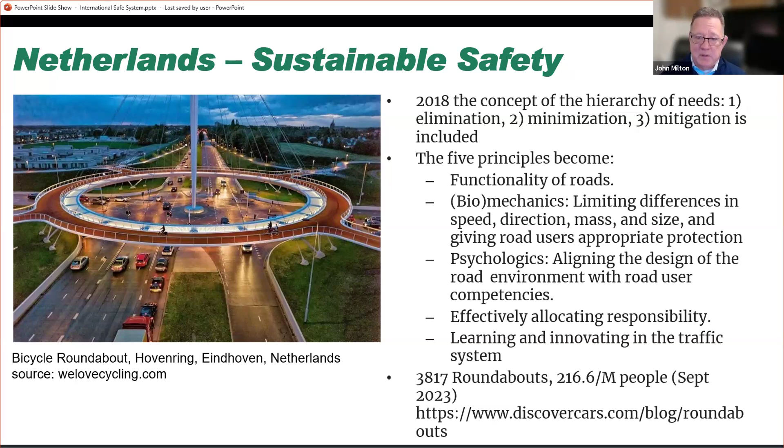The principles become functionality of roads, biomechanics. So limiting differences in speed, direction, mass, and size, and giving road users appropriate protection was one of their functions now as they go into their further implementation of the sustainable safety. They got into psychologics, or what we might call human factors, aligning the design of the road environment with the road user competencies, and then effectively allocating responsibility, our shared responsibility, and learning and innovating in traffic safety systems. Just an idea, they have 3,817 roundabouts. So their implementation is much further along than what we might see in Washington State.

The next country, and we often hear about Sweden as one of the primary factors in designing the safe system overall, they started with Vision Zero. Different in their approach as compared to what you had with sustainable safety, they really got into the philosophy as a moral obligation to bring that crash rate down to zero. In their country, it was as much about the design, but also about the willingness of the public to accept and understand what was expected of them in terms of road safety. They came up with a philosophy that no one should be killed or seriously injured in crashes. They really focused on setting targets and goals so that they would know and they could track where they were getting and the benefits that they were getting for how they were designing the system.

They also talked about allocation of responsibility for the prevention of injuries and essentially said that we can no longer, as a community, not address safety even when it's a behavioral issue. We need to do something. We need to look at the system and see what we can change to make things better. It's our idea with forgiving roadsides that you see in the US, essentially where we are designing roads for errors. If you think about it, why do we put rumble strips? Why do we put barriers? It's because people run off the road and they run off because of errors. We need to further that sort of thinking into everything that we do for walking and biking and for people and vehicles. The final thing was that they needed to be proactive. Don't wait for the crashes to occur, because if you wait, essentially you'll never get to zero.

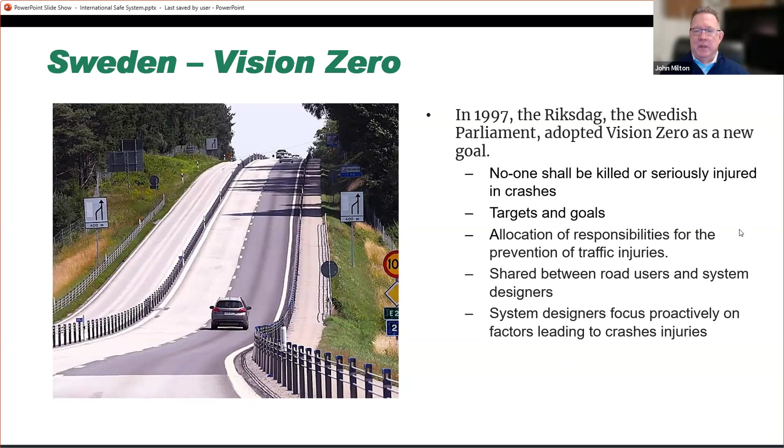So as this moved on, essentially in 2004, it was the Australian and New Zealand. That's when it really became the safe system approach. So in 2004 in Australia, you see it in 2010, New Zealand. And if you look at what they did in their country, essentially, was they brought in the philosophy, you'll see a lot of metrics in graphics that are similar to what we're doing in the US. But their action plan was to really focus on the enabling activities that would help get to the safe system. So a lot of what they were doing was changing the decision-making processes, essentially as to how you make a choice within design and operations.

What's fundamental to get to a low energy crash? How do we go about making those decisions? They really focused on data and measures of transformation of the system. So I'm out there making a change. Am I tracking that change so that I can learn from that change? But also, how much change am I actually putting out and where am I doing that? They're very focused on research and also supporting of local governments.

Now, their priorities were really to focus on infrastructure investment and planning. So, this is something that's really important for us to learn in the United States. Without focusing on that planning part, essentially working with the public and dealing with elected officials and all those things that really go on at the beginning of the project, if you don't start the project right, you're not going to get it right in the very end.

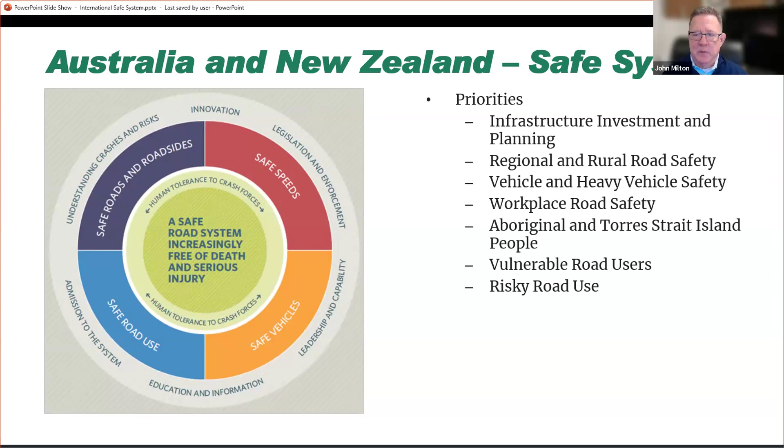One thing that you'll also see that I think is really important and something that we're trying to implement at the national level is the idea of this exposure, likelihood, and severity. By understanding and having a common definition of safety, and not just as a one factor sort of issue, it's about what changes. If I bring in new vehicles, what should I expect? Well, you should expect crashes to go up, bottom line, because exposure goes up, so do the crashes. The likelihood is about what we do and how we design the facility. And then severity is about mass and speed primarily. It is about reducing kinetic energy at the time of a crash.

They also brought in the idea of treatment hierarchy. Some roads essentially will get a much higher level of design than other roads. So they have primary transformations. They also talk about supporting roads. So their investment scenario is not all everything. It is really focused to try to get that. We're all in constrained environments. We all need to make some pretty hard choices, but their approach is really effective overall.

So I wanted to show you in the context of what we're doing in Washington, but also we're seeing probably more of this occurring now at the national level, is that we talk about exposure, likelihood, and severity of crashes. When you make a choice in design, for instance, adding a left turn pocket, I always like highlighting this. That change may be a beneficial thing for safety, but it also may have counteractive effects. If you think about, I've now added a left turn pocket because I want to reduce rear enders or I want to reduce angle crashes.

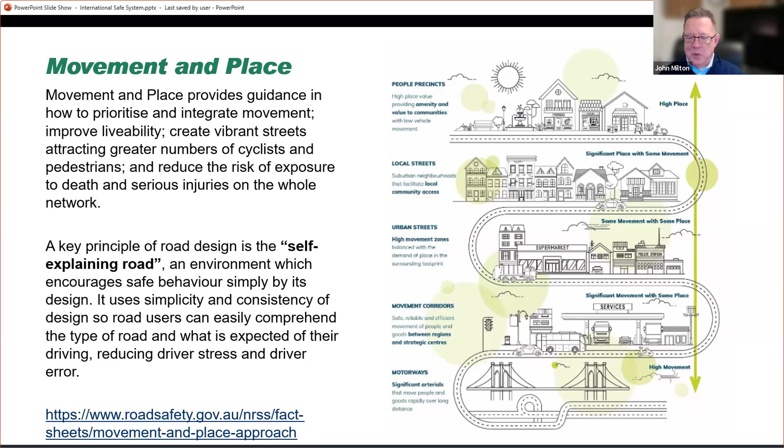Self-enforcing roads help constrain those types of behaviors, for instance, speed, risky overtaking, in locations where we put barriers so that people can't cross over the center line. I'll talk a little bit about the decade of action. I know I don't have a lot of time here, but the second decade of action is really something that was focused on internationally. This is what's adopted through the UN criteria, and what you'll see over most of Europe, many parts of Asia, as well as Africa. And this is really about targets, about understanding what you're doing in trying to achieve those safety goals.

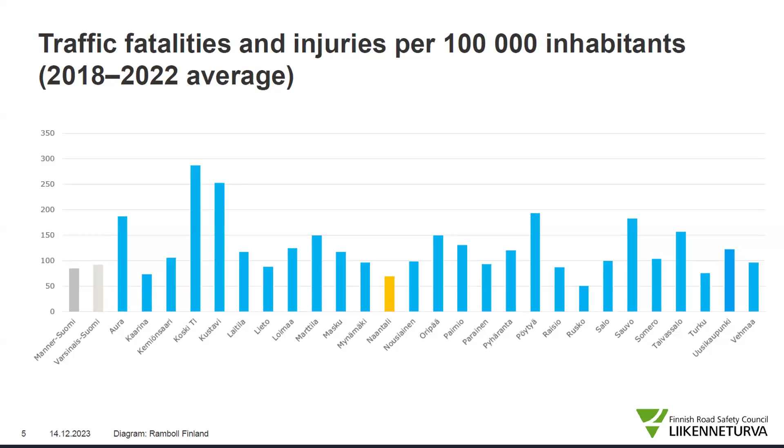And we got to visit the actual city. This is a suburban city, Naantali, that actually achieved zero fatalities. That location looks like this. This is a suburban city. It's kind of a resort community, high speed facilities to access, but separated facilities for people walking and biking. Of course, it wasn't that way when we visited. It was actually snowy again, but the infrastructure is well maintained for access.

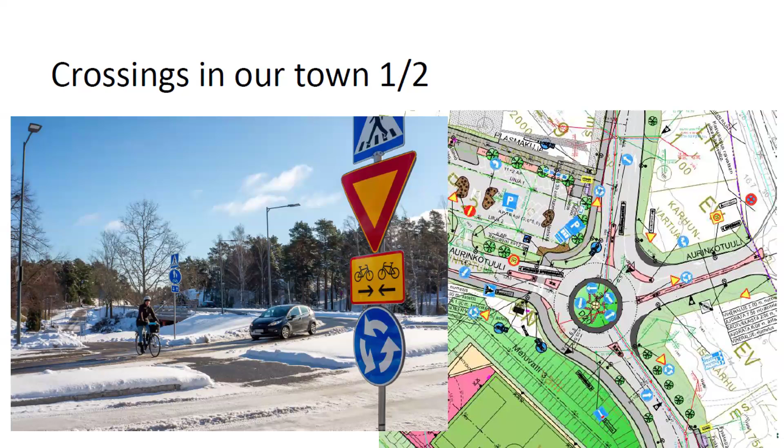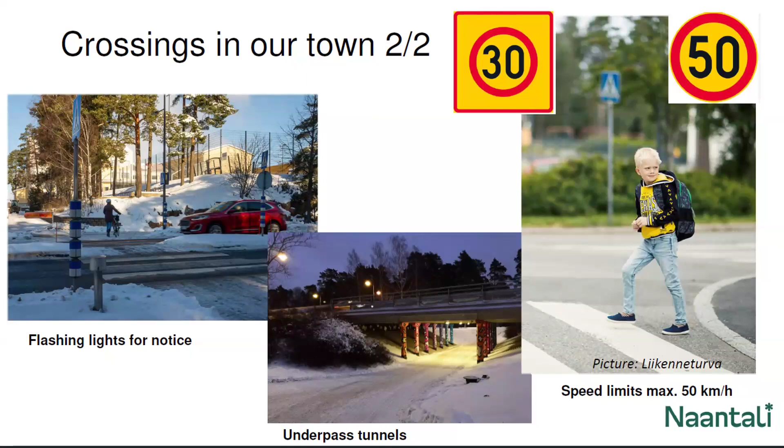And what they told us is that this city, Naantali, made a policy choice that any intersection that needs improvement for a traffic signal, they're going to put in a roundabout. So there will be no traffic signals as part of the city infrastructure, because they know that roundabouts are the safest infrastructure. And when you're crossing these locations, they have treatments that provide that safety. They have these paths that are well lit and provide really good access for all the community users.

And they have a system that's called a day fine. So it's not a fixed fine, but it's adjusted to your income. And so in a famous case, and a more recent one, a multi-millionaire businessman was hit with the world's highest traffic fine. So it really does change behavior, and it's shown about a 24% reduction in fatalities after the implementation of this automated speed enforcement.

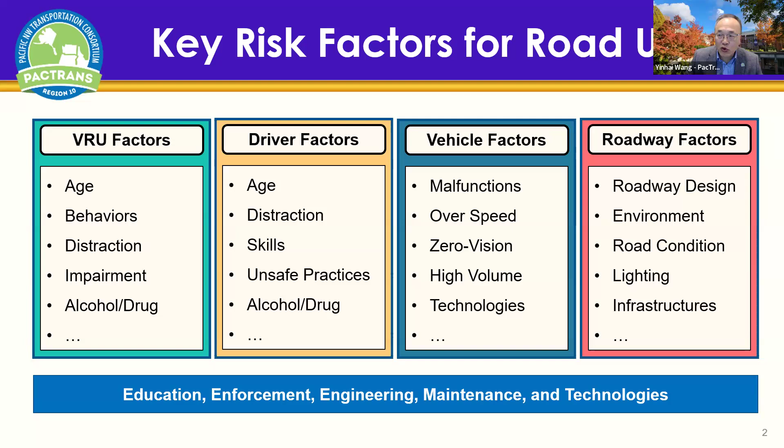In recent years, we see a lot more new technologies coming out, and these technologies could be applied to improve the human factors, vehicle factors, and roadway factors to try to reduce crashes. So today I'm going to briefly show you some of these technologies from the human side, vehicle side, and the roadway side.

We all know that every 52 minutes, somebody is killed in a driving under the influence crash. And there are some technologies that we have tested before, like this picture shows. This is a technology we call an ignition interlock device. A driver can test their breath to find out the alcohol percentage. If they are drunk, they cannot start the vehicle. I know NHTSA started a proposal to install these devices in all new cars in 2025. I'm not sure exactly where we are with that particular technology.

And in recent years, there have been a lot of new developments in using machine learning-based face tracking technology to find out if drivers are focusing on their driving, are distracted, or are driving under the influence. These technologies have been tested in many different scenarios, and some vehicle manufacturers are considering installing these devices in their new cars. I think these will significantly reduce driving under the influence crashes.

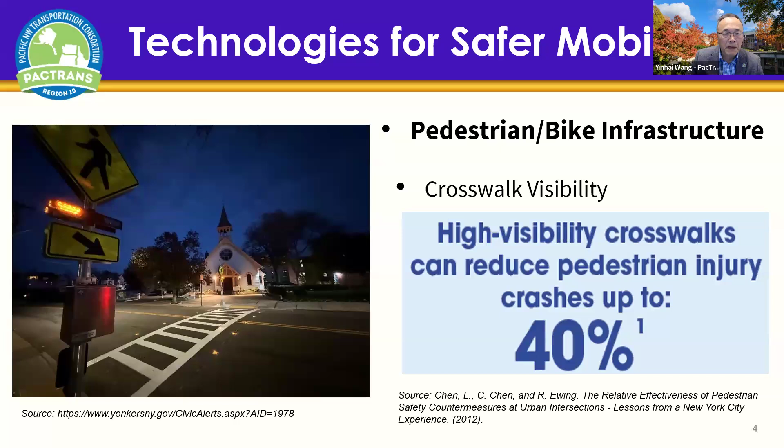And on the road user side, sometimes there's a blind spot from the vehicle driver side or from the bicyclist or pedestrian side. So cellular vehicle-to-everything technologies will be helpful. A bicycle rider may receive a message about a potential upcoming vehicle, even if the bicyclist cannot see it, right? Also on the vehicle side, drivers may be notified there's a vehicle crossing right in front. These things have been actively tested, there are some new technologies available, and more will be available soon.

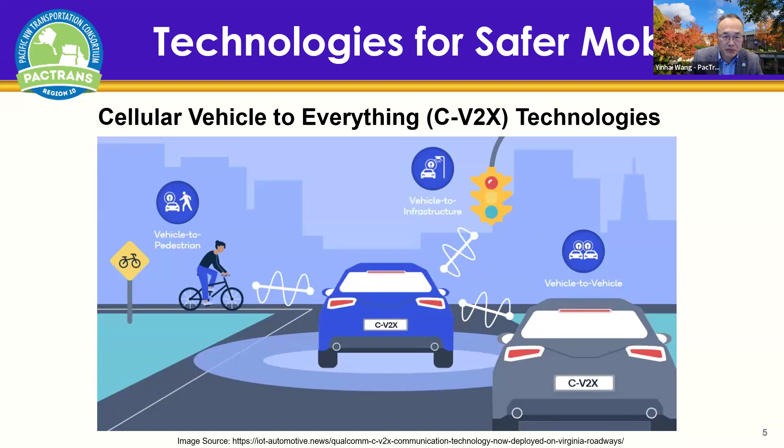So also on the vehicle side, we see a lot of newer vehicles with somehow autonomous driving functions. So the left picture shows a screen of Tesla. I see a lot of people driving Tesla now. I counted on the UW parking lot. I think about 30 to 40% of the cars parked there are Tesla vehicles.

And almost every Tesla vehicle, you will see this kind of surrounding environment. When you're driving, you'll see the vehicles surrounding you, and also pedestrians. So this kind of sensor-based data, not only to assist the driving, but also make the vehicle informed about the potential danger around the vehicle. So I think such data will be more valuable. There could be more applications developed on top of these data sets.

Almost every newer vehicle, they have this advanced driver assistance system. Just like you are not aware of something or the vehicle ahead slowed down, there will normally be the warning sound, or the vehicle could automatically stop. So these technologies, I think, are very practical, even they are not in the full autonomous phase, but they are definitely helpful to reduce the number of crashes.

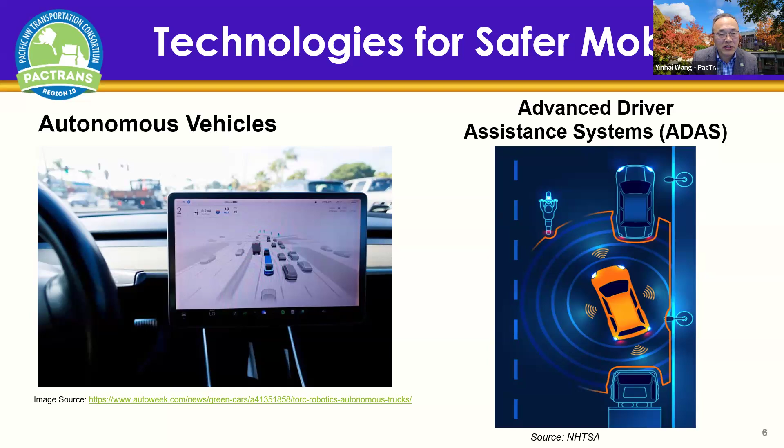On the infrastructure side, I see a lot of research ongoing talking about how we could integrate the sensor input and the infrastructure's operational functions, and also letting the drivers know the potential operational changes, like the traffic signal control changes, or the vehicles who may have a conflict with this current vehicle. So there's just the new technologies on the way.

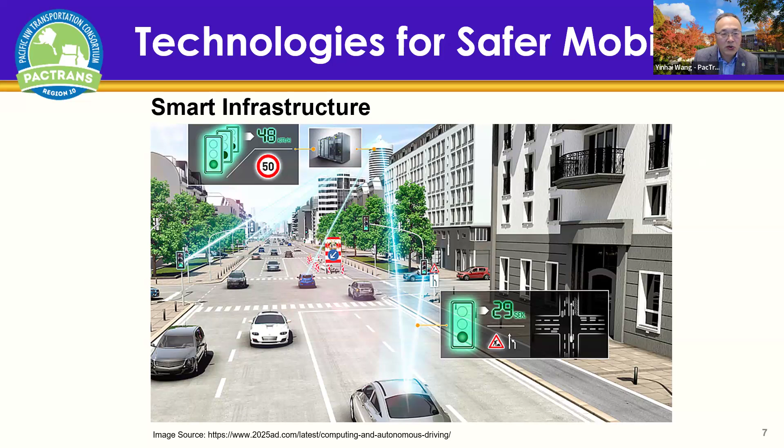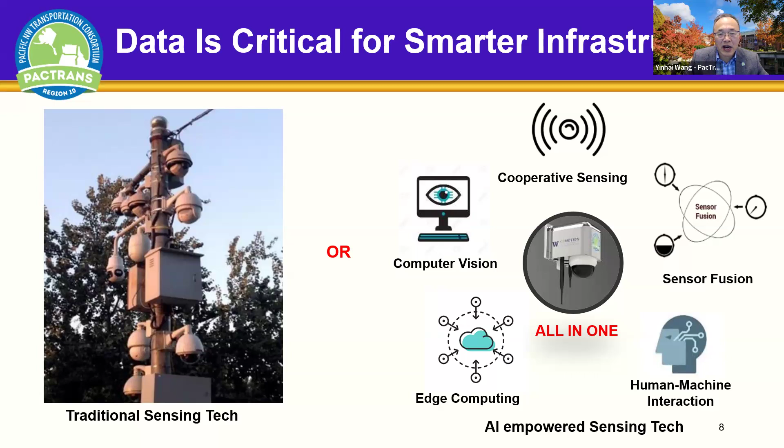So the STAR Lab researchers, we combine different kinds of sensors and put their input in one device. So we have a cooperative sensing, and also using computer vision and edge computing technologies, try to process the data, and we can extract the information needed by the traffic operation engineers or needed by other professionals for this particular road.

So in particular, we designed this technology and also engineered it, try to make it applicable in very cold weather conditions, like -40, or very hot weather conditions. And we try to sense not only the roadway, but also the surrounding environment. So very often you see black ice happens when the temperature is cold enough, right? And also the humidity is reaching a certain level.

So if we could use this particular technology to collect such data, and also combine the data and inform the traffic operators, and also inform the road users, the drivers, about what's going on, we could avoid a lot of potential crashes.

And also, we have a lot of roadside units deployed, but I see a bigger problem with this roadside unit is there's no input, like the sensors may not be supporting the needs of the roadside unit. And also the roadside unit is passing the data to the traffic control center, but the center engineer may not know exactly what to do with this, because only limited locations are equipped with this kind of roadside unit.

So if we could combine the roadside unit function with the traffic sensing function, a lot of control could happen in the local area, even without having to go through the traffic control center. That's another important design concept for this particular technology.

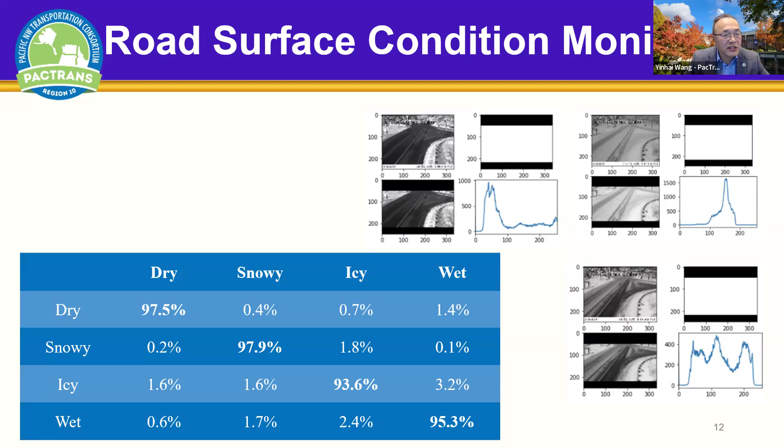And also by combining the vehicle sensing, road surface sensing, and environmental sensing, we can tell if this particular section of road has dry pavement or wet pavement, or is covered by black ice, covered by snow, or partially covered by snow. So all these things happen on the same device. And if we know the road surface condition is not good, we can certainly inform the traffic operation centers or the road users to pay attention.

So one of the most important variables for driving is actually visibility. But we don't have a lot of visibility sensors because they are quite expensive. I heard each unit is at least $30,000. But if we could turn all our surveillance video cameras into visibility sensors, I think that would be a huge gain, right? We have so many surveillance video cameras, and simply by deploying software, we can make them also measure visibility. I think that would be super helpful.

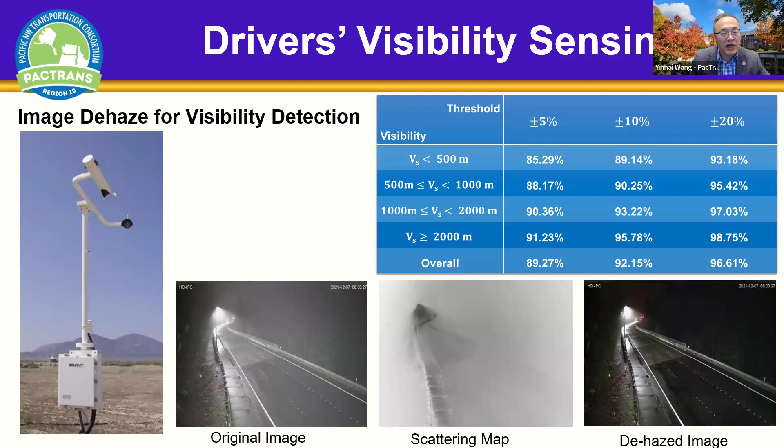So this slide shows the original image on the lower left side, and you see we extract the scattering map using our technology, and you can see a dehazed image, which we can see very clearly, right? So by looking at the scattering map, we're able to tell what the visibility is. And this visibility accuracy is also quite good. We don't have ground truth data, so we use the visibility sensor data as the ground truth, but the visibility sensor may not be 100% accurate either, right? But anyway, I think this level of accuracy makes it good for transportation agencies to use to measure visibility.

And we also need to have communication between the system and the users, right? So we developed a phone app, and people can access it to see the live traffic condition, the sensor-detected data, and also any warning messages, like there's black ice here, please drive slow, or take some particular countermeasure, right? So this information is available to use.

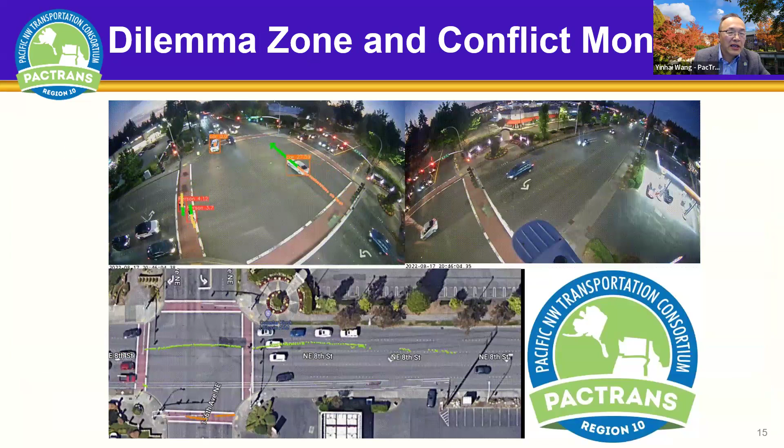And the technology can also be used for detecting potential conflicts at intersections. And we deployed our own technology to try to increase the accuracy. Here, the left side picture is where we just grab a computer science model and try to detect pedestrian movements at the intersection. You see the accuracy is not very good, right? Because that model is not developed for transportation applications. But the right side picture is based on our own model. We consider the traffic conditions, and this particular methodology captured 100% of the pedestrians moving in this area.

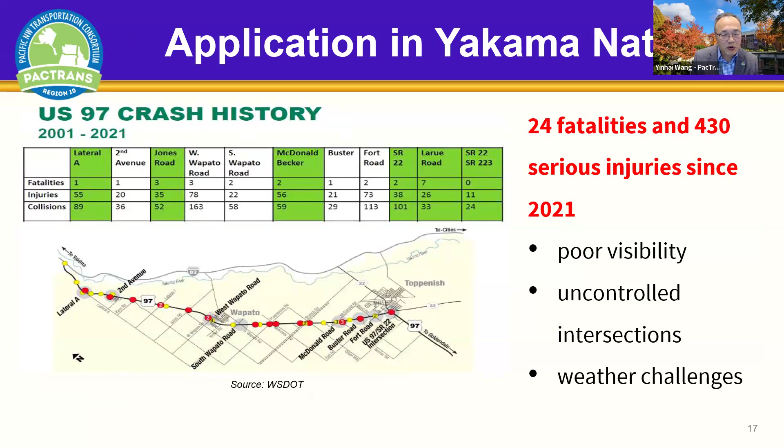So to make an example application of this particular technology, we selected US 97. You all know US 97 is one of the most dangerous corridors, if not the most dangerous one, in Washington State. There have been 24 fatalities and 430 serious injury crashes since 2021. And there are a lot of challenges like poor visibility, uncontrolled intersections, etc. So we deployed our sensor technology here with the Yakama Nation engineering division.

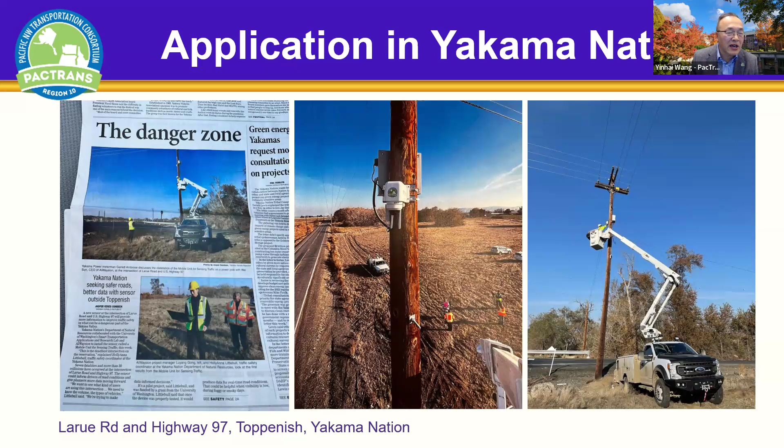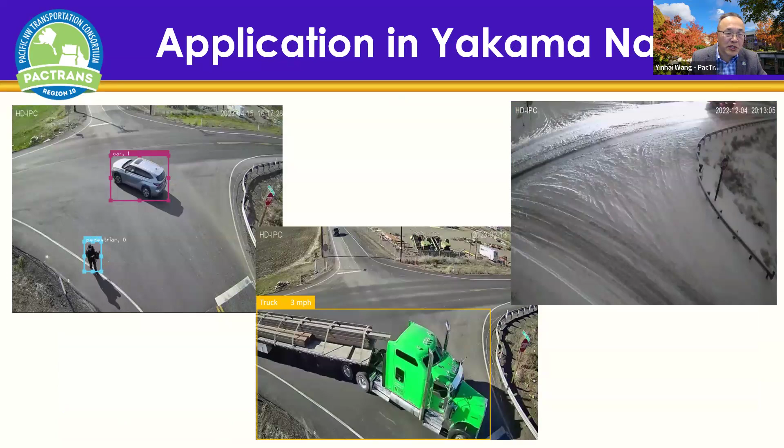With help from WSDOT, we put the sensor up, and the sensor installation drew a lot of attention in the local media. And over the past several years, we gathered a lot of very important information: at this intersection, 70% of vehicles are large trucks or agricultural vehicles, there's no pedestrian crossing mark but a lot of pedestrians use this location, the weather challenges, etc. So after several years, we see the value of this technology application, and this project was given the Federal Highway Build a Better Mousetrap Innovative Project Award, and also the Best All-Round Award in 2023.

So if we have such a technology, we may potentially prevent this tragedy from happening at several critical points. One is when we see snowing, right? Visibility gets lower. We can generate a warning. The second, when the snow covers the road, we could generate a road surface condition warning. And when the first crash happened, we could generate an instant warning, right? So there are multiple points where we could generate a warning message for the agency to come do something to prevent this tragedy from happening.

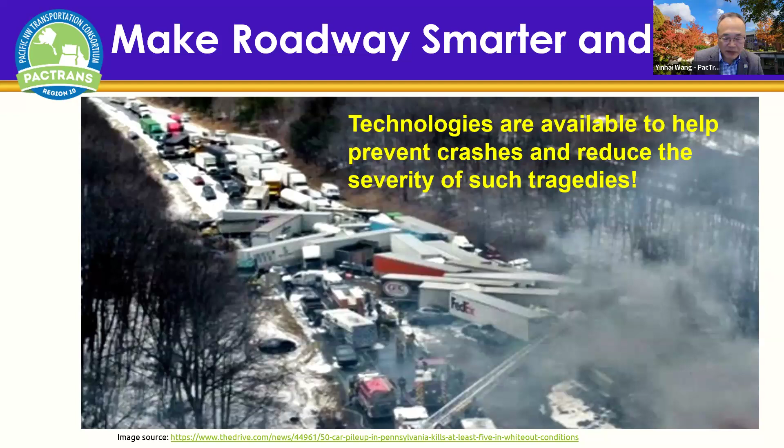So anyway, that's my quick summary of some new technologies. And I will pass the microphone to Tim McCall.

Tim, you're on mute. Yep. Thank you. Sorry. My screen changed on me a little bit. So I wanted to thank you all for inviting me here.

So I wanted to briefly talk a little bit about sustainable urban transportation operations within Germany. And this is a little bit more of my personal experience and some observations that I made as a user of the transportation system there, and also visiting a transportation operations center in Germany.

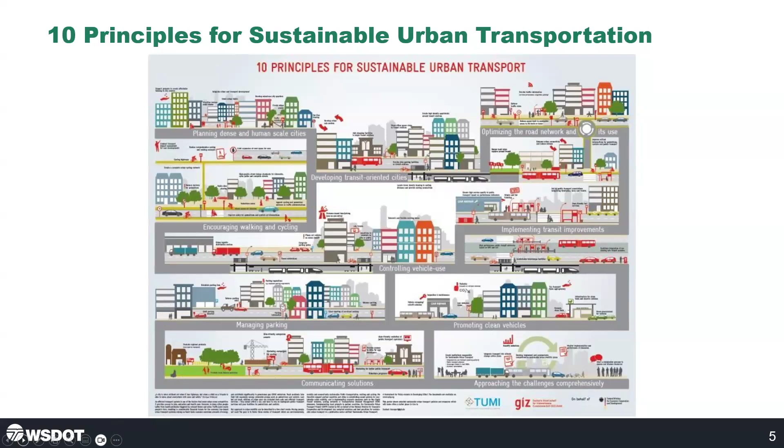So this was the first iteration that was actually provided to me when I went to the Traffic Management Center in Berlin. Last year, they did revitalize this document, and they did provide a couple other items. So rather than just looking at clean vehicles, they want to look at electrifying all vehicles, and then really trying to win support from stakeholders and citizens that may be apprehensive to this type of change, and then really empowering cities to avoid, shift, and improve.

So really kind of move away from the car-centric operations and really improve the street environment. You'll also notice too that there is a push for more complete streets, and that's something that we have really embraced here in the state of Washington.

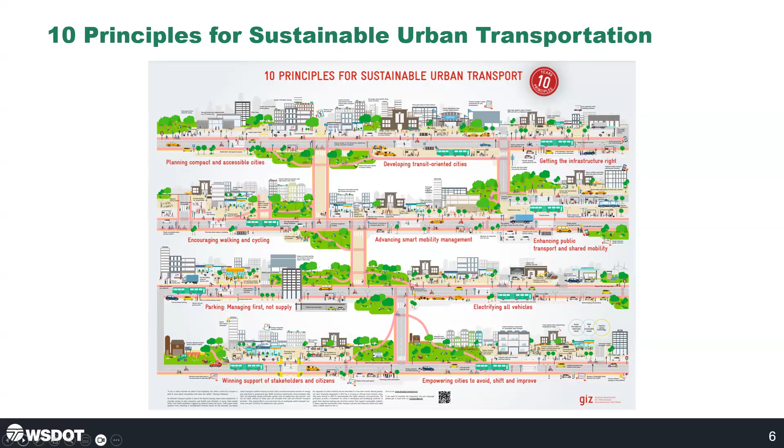So a couple of things that I wanted to highlight. These are the most recent 10 principles. One of the things was getting the infrastructure right, advancing smart mobility management, and enhancing public transport and shared mobility. Notice that there's a lot of smart mobility, and it ends up being kind of phone access. But really getting the infrastructure right was really focusing on real-time traffic conditions as well, and providing real-time information to roadway users.

So incident management isn't too much unlike what we see in the US. We've adopted some of these concepts like active lane management, variable speed systems. So in urbanized areas or congested zones, you will often see these overhead signs, much like you would if you're driving on, for example, I-5 northbound into Seattle, where we have lane control and then speed management to provide platoon protection, but also provide speed harmonization in the system.

One thing that you'll notice if you do go to Germany is that you will see CCTV cameras, but they aren't shared publicly. So that is one thing that I did want to highlight there. And then one thing about getting the system right was, and Dong Ho also mentioned this too in his presentation, that traffic laws are strictly enforced. There's a lot of automated enforcement. You'll see some of those old school pylons, and they still use some of the old school camera boxes along the Autobahn and some of the thoroughfares to catch folks that are speeding.